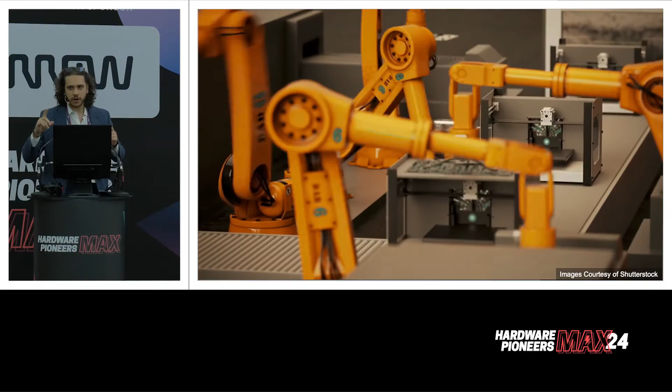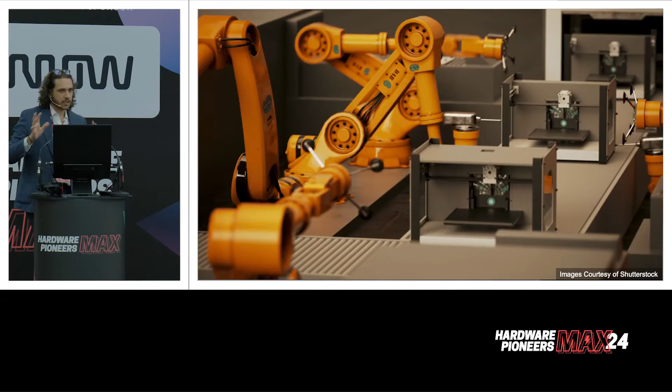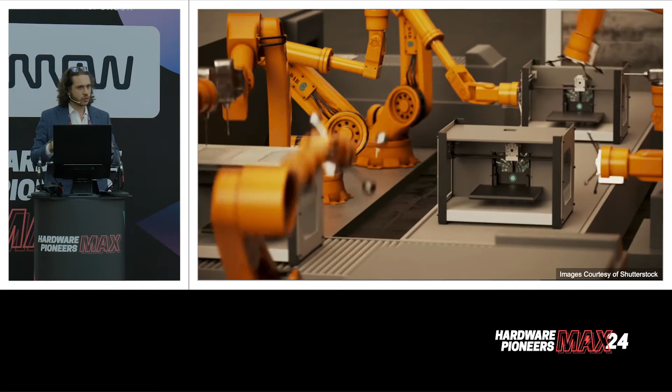So I'm gonna talk about robotics in a little bit of a different way. As you can see here in the animation, we see a production line in industry where robots are extensively being used to essentially optimize the manufacturing process in terms of precision and control at each step.

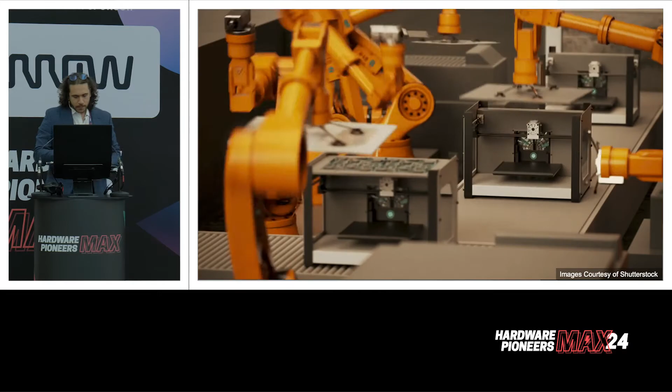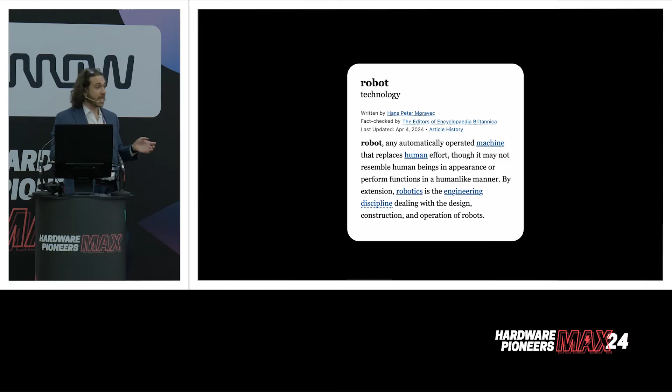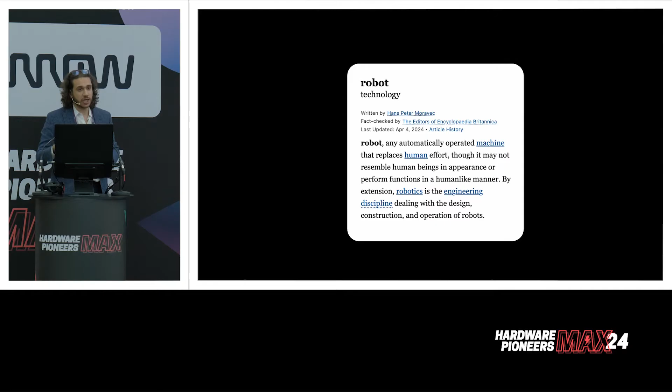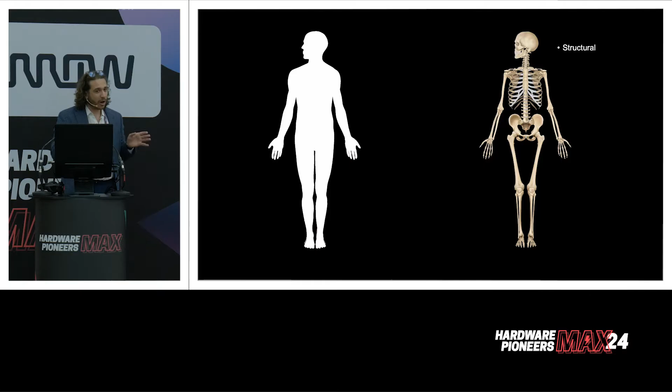Now let me introduce you to Bob, which is a normal guy like me. He's from Italy, so he likes pizza as well. Inside of Bob, as we know from school, 80% is made out of water. Isn't it incredible if we think that 80% of all we are doing, all we are thinking, is made out of water? And if we go inside Bob, there is a skeleton, which is essentially the only part that is hard, and is making it passive as well, because it's just a structural component. It keeps organs and everything else kept together, but it doesn't have any other function.

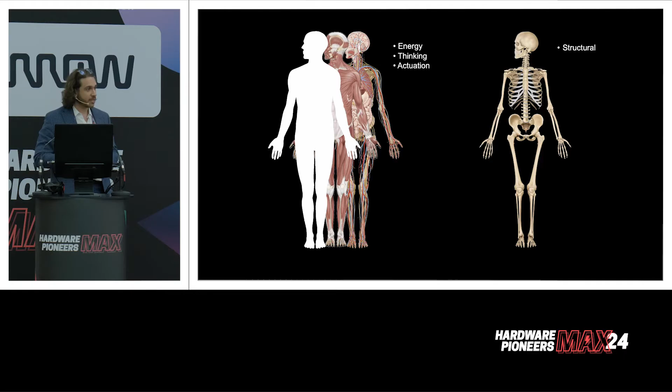Instead, all the rest we have inside, which is muscle apparatus, circulatory system, and whatever else, let's say also everything that makes us think, is soft. And comparing weight, if we compare it to a normal Italian guy that eats pizza, 10 kilograms is for the skeleton, and instead 70 kilograms is all the soft part.

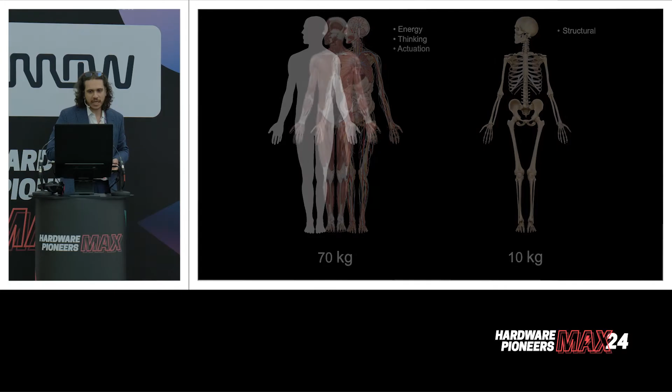So I came here to say that we are working on robotics with the wrong assumption, because if we want to make them resemble human beings, we need to make it soft. Otherwise, we're not doing it the right way. So that's why I came here to talk about soft robotics, which is what I've been working on as a PhD student and as a master's student. Moreover, I'm going to talk about the interaction with the external environment and why soft robotics is so important in this field.

So, do you know what a soft robot is? And moreover, why do we call it soft? We call it soft because we just use soft components to make a robot. As soft components, I could say, for example, liquid, air. And robot, I'm saying everything that includes robotics, which is from the control and electronic systems, the energy harvesting, because we need energy to power our robot, the active sensing, because we need feedback to understand what's the interaction, how is it going, and moreover, the actuation, because we want it to move, we want it to create the interaction.

That's the goal. So just to give a brief example of why soft robotics is important, what is the market out there: we're talking about a market that nowadays is $800 million in the world and is expected to increase to $10,000 million in 2030. Think about the applications of having a robot made soft.

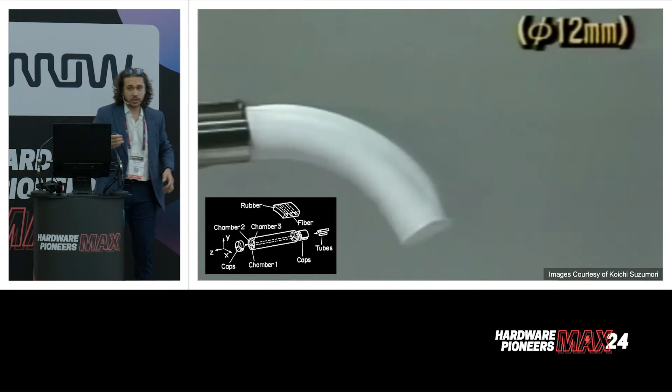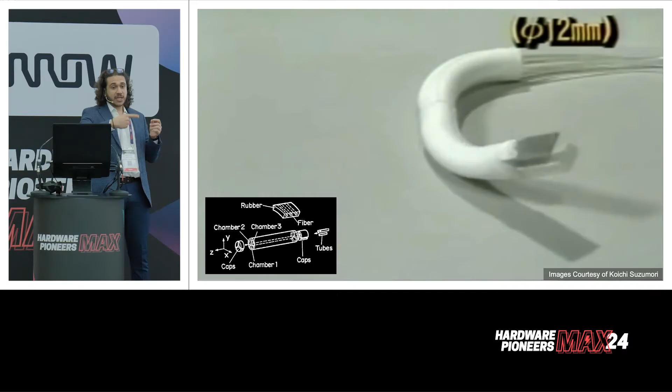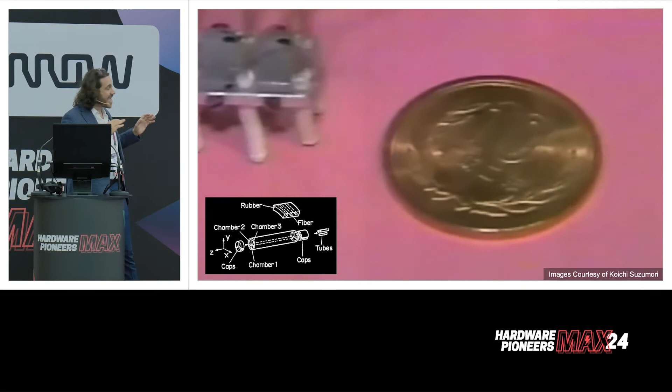For example, in medicals, this is a chamber from Koichi Suzumori, a very cool professor from Japan, who developed this chamber, which is essentially made out of a triagonal chamber. It has rigid components on the length side, which means that when we inflate it with air, it doesn't elongate, instead it bends. And it can create amazing movements and be as small as a coin.

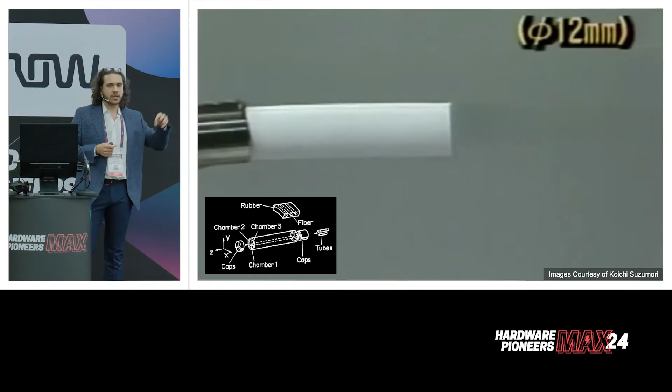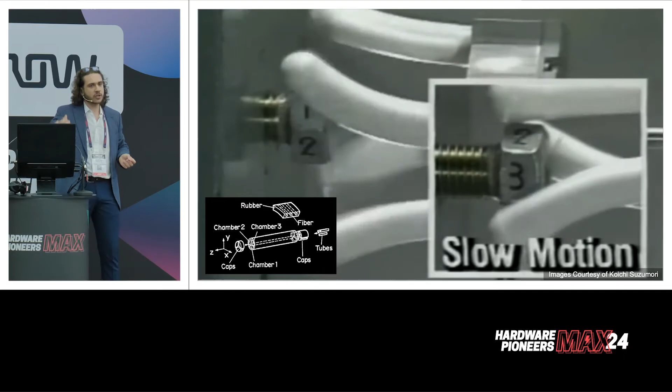And if you think about all the applications for this, from production lines where you need grippers to manipulate very soft materials, for example food, or other applications such as medical parts, where we need endoscopes and other things that need a very careful interaction with the human body.

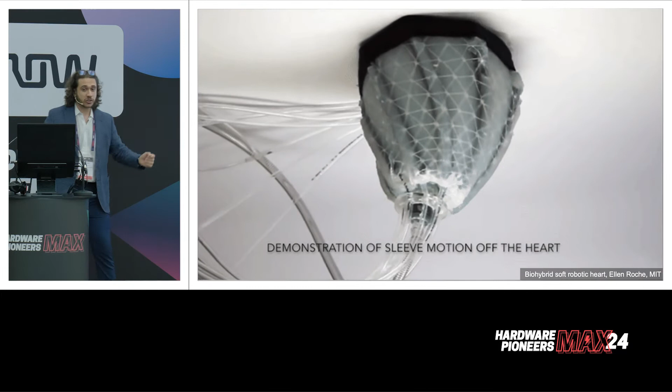That's crucial. Moreover, this is from my friend from MIT, Ellen Roche. She developed this biohybrid sleeve, a biohybrid heart. So essentially it's a sleeve that can help your heart pump, and it could essentially make your life longer.

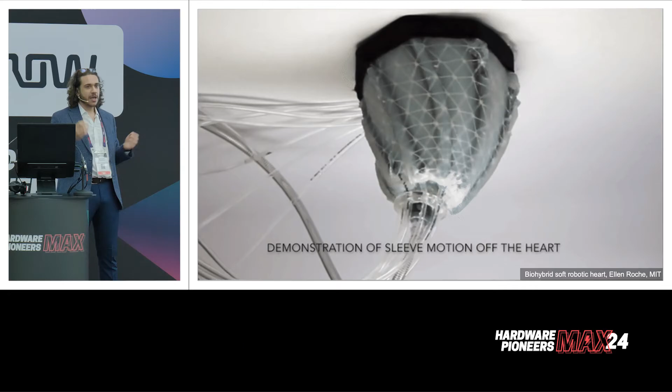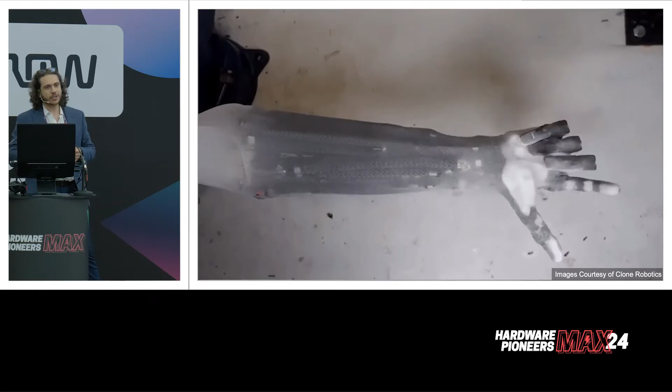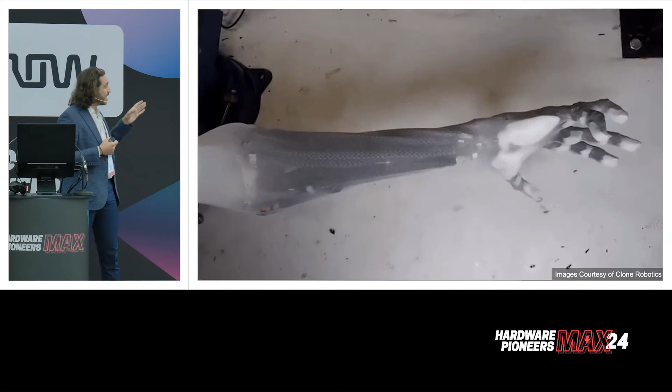I included also this cool thing from Clone Robotics, which is a little bit off topic, but it uses soft robotics. Essentially, air is pumped inside these contracting sleeves, and with this they can mimic what the muscles are doing inside their body. You can see the precise movements they achieve with the entire hand, which is a very complex joint.

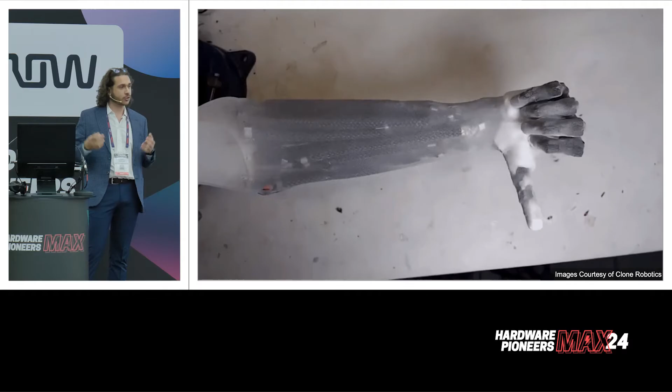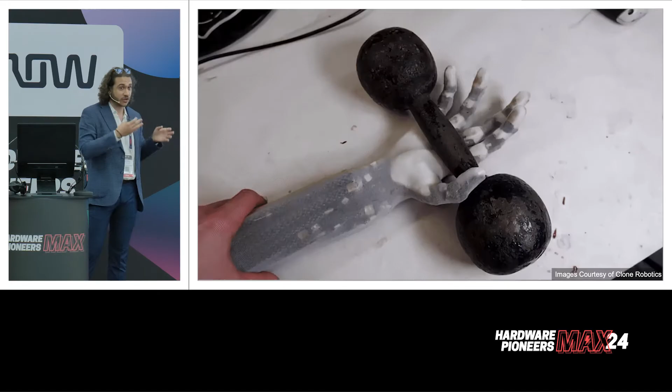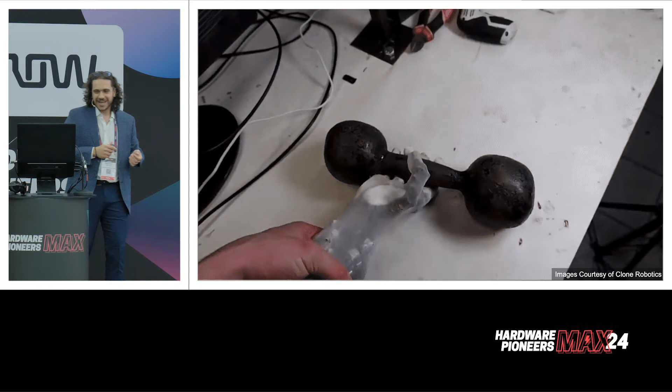As you can imagine, all the examples I show here are very cool because they have a nice application in the real world and they already exist. They're already being used in industry, medical applications, and so on. But what's the problem? Why don't we hear a lot about it? Why don't you know about it? That's because we are still facing some hard problems.

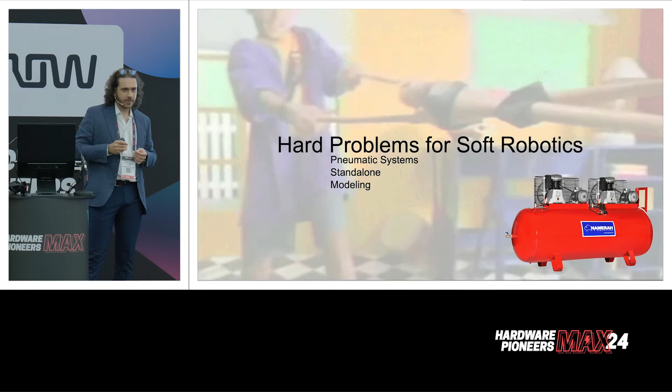If you think about the examples I showed you, they all rely on pressure. And pressure is something that is quite difficult to achieve. You still need a pneumatic system to get that pressure inside the robot and make it move. So it's very difficult to make it stand alone because we're still relying on that old-fashioned compressor we all know.

Moreover, we also want to model everything about the robot because we're trying to predict its movement. And a soft robot, knowing it's inflated essentially with air, is not that easy to model. So there are a lot of problems to be tackled.

And that's why I'm here, a little bit more specifically, to talk about soft robotics, but from the smart materials point of view. As I said, I'm a soft roboticist, researcher, sorry. I have a biomedical engineering background, and as part of my PhD I've been working on developing electroactive polymers, which are materials that try to get all the function of a robot inside the material itself. So think about a material that can essentially sense and actuate without the need for an external huge pump, just with an electrical input.

So you give an input, you get an actuation, or you get motion, and you get an output as an electrical output. Even more specifically, I've been working on dielectric elastomer actuators - a fascinating word, dielectric. We're using the capacitive effect to make these transducers, and we use it for diverse applications - for example, actuating, sensing, but also generating, because we need power to actuate our robots. So the vision is essentially to make a robot fully soft like our body is, except for the structural component.

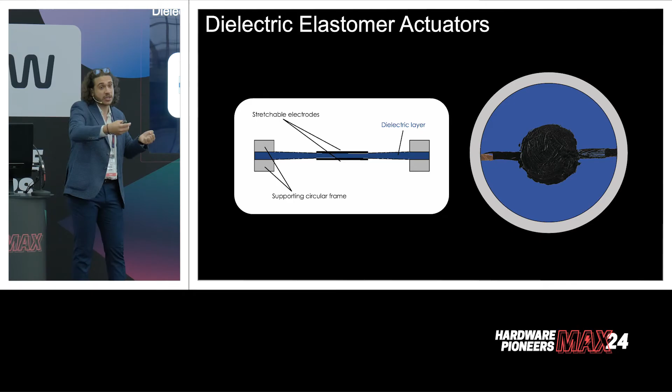You can see here on the left, this is a side view of a dielectric elastomer actuator. Essentially the blue part, which is the insulating material, is very thin and can squish down. By squishing down, because of the volume conservation principle, it also needs to expand, so we have area expansion. That's a front view, a top view of an actual actuator. The black part is carbon grease, so essentially it's compliant, stretched within the membrane, while the membrane is the blue part, which could also be transparent.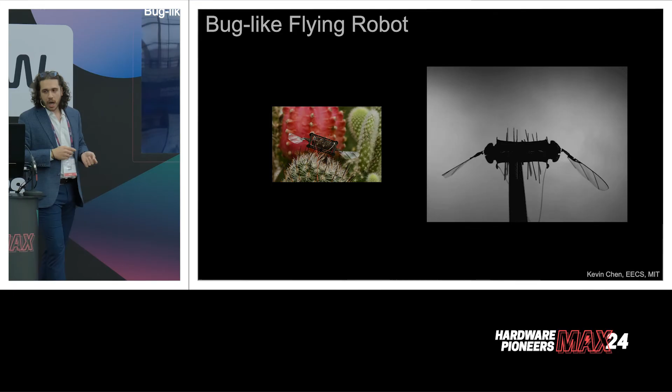So with this, it's very important. You saw a very easy configuration because I talked to you about a planar capacitor, but we can make any possible configuration in order to get a lot of different applications. For example, they invented a rotor, a motor, entirely actuated by the dielectric elastomer actuators. We developed a laboratory mixer, where the actuating parts are completely soft.

That's quite nice because essentially the mixing container, which is at the center, the little vial there, or just the central top, can move thanks to the actuating motion of these four components. And we can achieve very interesting complex motion dynamics because essentially the four actuators are soft, so they can actuate simultaneously and don't interfere with each other because they're not joined.

This work here was published in Nature, and essentially we were trying to see if a complex dynamic-based laboratory mixer could enhance the mixing performances of liquids and could possibly be used for medical and biology applications, because we were investigating if we could feed cells in different ways all around, giving feed and nutrients in different ways.

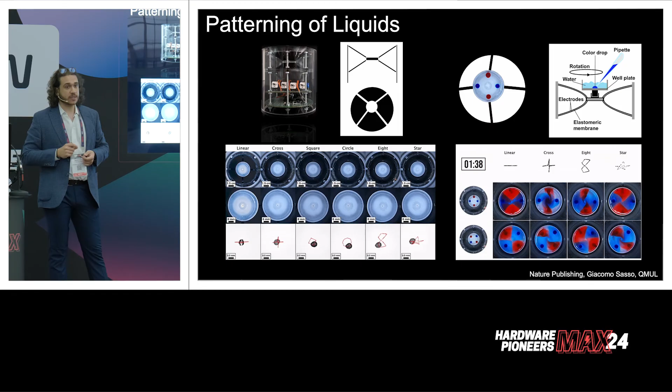This is also very important because, as I said, we are using capacitors, so we have almost no loss in current, which means we are not producing any heat out of the device. If we're using this device in a controlled environment, we don't have any heat production outside. So if you think about cells, where temperature is massively important, we don't have even 1 degree of increase in temperature inside an incubator, and that's astonishing.

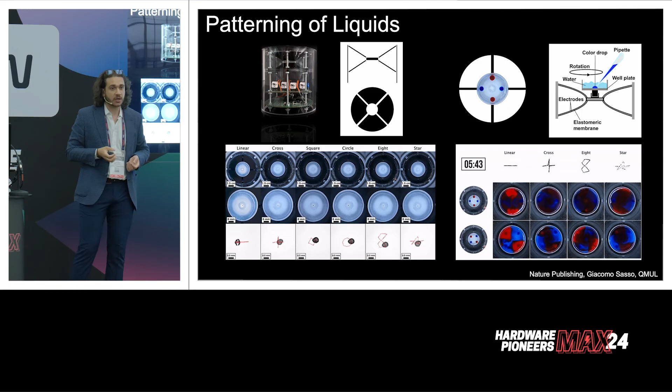Just 2 more examples: VR, AR, augmented reality, Meta, Facebook, Apple. Everyone is working towards trying to keep us inside a room and feel the world while staying on our chair. Or, for example, if you have a girlfriend who is very far away, you can get in touch in a more physical way. Haptics is very important, and as easy as it looks, a bubble that can inflate can give you the sensation of touch.

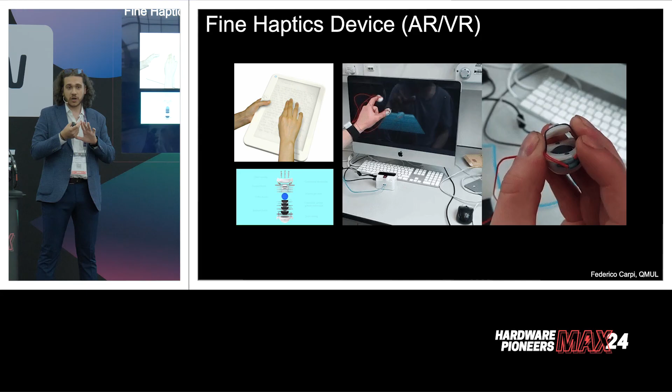This device here was developed by my supervisor, Professor Federico Carpi from University of Florence. They developed a bulging mechanism enabled by dielectric elastomer actuators, which gives you the sensation of touch when actuated, which is crazy because you can feel like touching stuff. I tried it. You can feel like touching stuff just by having these devices on your hand.

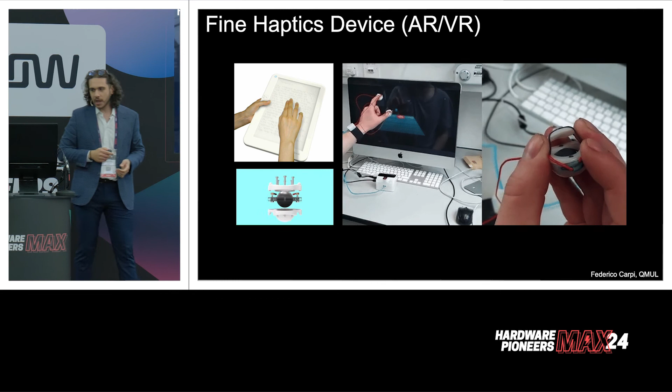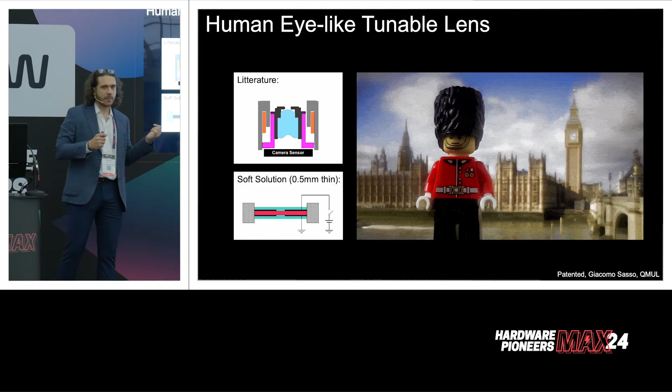Lastly, this is a project we've been working on in the last couple of months as a research assistant. This was also sponsored by ESA, the European Space Agency. We developed the first 0.5 millimeter thin tunable lens that can beat the focusing performance of a human eye.

Essentially, as you know, cameras work by shifting the focal point by tuning, changing where the lens is relative to the sensor. So as far as the lens can go, you can see what focal range you can get with the lens. But the human eye works totally differently. Essentially, you have a soft lens inside, which is still soft, and it changes its shape thanks to ciliary muscles that stretch this lens and make it change its curvature.

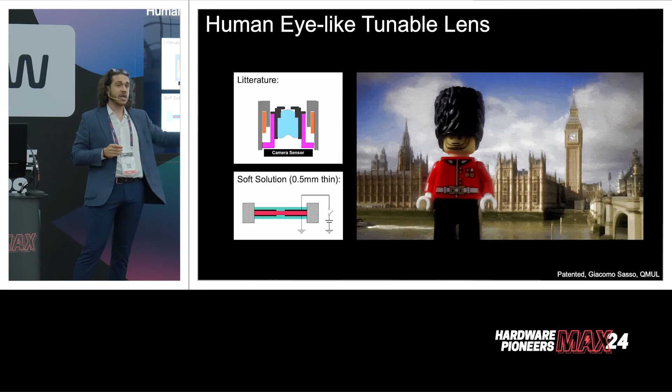That's what we did in a 0.5 millimeter thin lens, and we can, as I said, beat the focusing performance of a human eye. Starting from 4 centimeters, we can focus until infinity. And this is the proof with the Big Ben in the back.